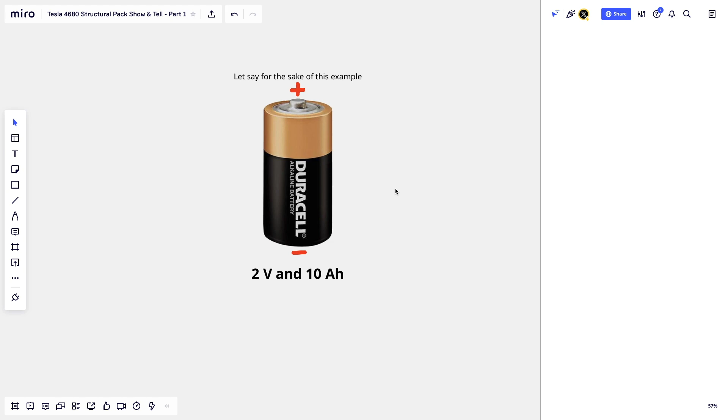And there's basically two concepts I want people to just remember from this. If you're connecting batteries in series, you're adding up the voltages. And if you're connecting them in parallel, you're adding up the electrical charge. That's the only thing I want you to remember from this whole thing. So it's not very complicated. And let's try with an example here.

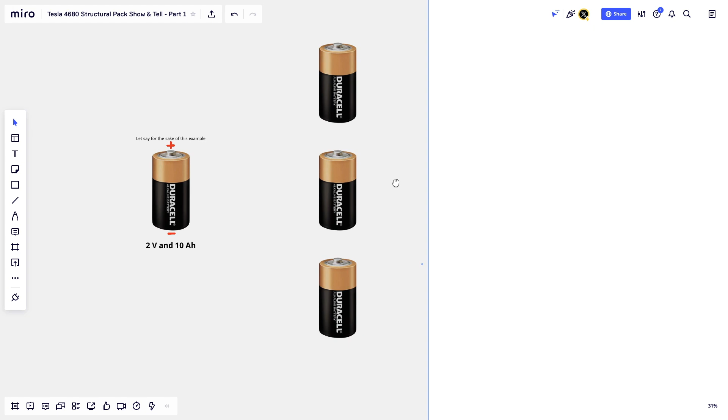So I'll just move this a little bit and zoom out a little bit. Okay, so we have 3 batteries here. So let's say I connect them in such a way. So let's connect this to this. Let's connect this one to this one. And let's take it here on top. This. And little boo-boo here. Let me zoom out a little bit more.

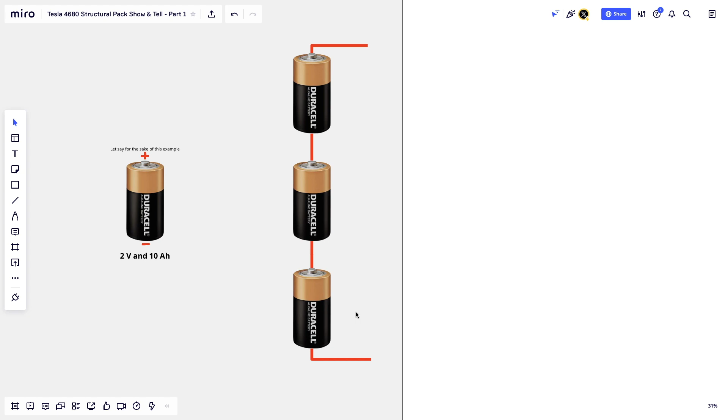Yeah, so if I connect them like this, if the red lines are like wires, do you have an intuition where the positive and the negative is on this arrangement? I mean, you already mentioned that the positive is on the top. Okay, so right? Here would be the positive on top, the wire coming out, right? And negative would be here at the bottom. This is called a serial connection.

And what you have to remember about serial connection, and you can use anything like stacking them up, is basically positive connects to negative, and positive connects to negative. So you can replace this with a battery that has a positive and a negative. Even if there's three in them, it's still positive. When positive connects to negative, opposites to each other, it's a serial connection.

And if you remember, I said, what do we do when it's in series? We add the voltages. That's the only operation you can do, is add the voltages. So if I ask you, what's the voltage of this arrangement, what would you say?

Exactly. So this is 6 volts. Perfect. I hope this is making sense to everybody. If it's not, just call in and we'll sort this out.

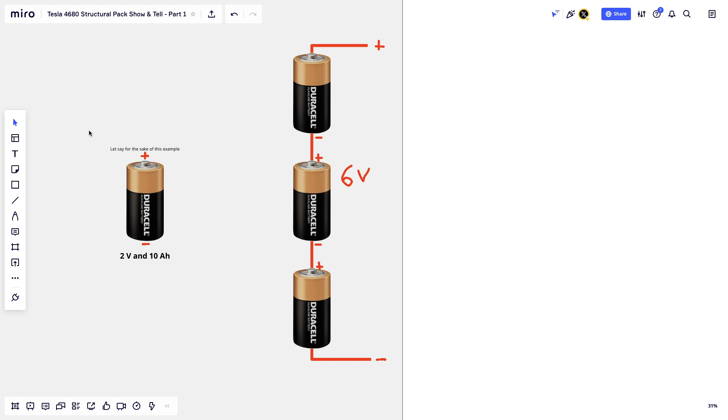So here I have another arrangement of 5 batteries. Now, do you have an intuition where the positive and the negative of this circuit is? Well, the positive is on top and the negative is on the bottom. And of course, if I had flipped the image upside down, you would have said the opposite, right? It's not because you think positive is top and negative is bottom. It's just because you're seeing the nipples. So here is positive, here is negative.

Now, if you see, we're connecting positive to positive here, right? And we're connecting negative to negative to negative. So this is the opposite of what we were doing before. Before, we were connecting a positive to a negative or a negative to a positive. So this is called parallel. Okay. And what did I say about parallel? What's the operation you can do on parallel? You add all the ampere hours, right? Yes, the electric charge, we add them up.

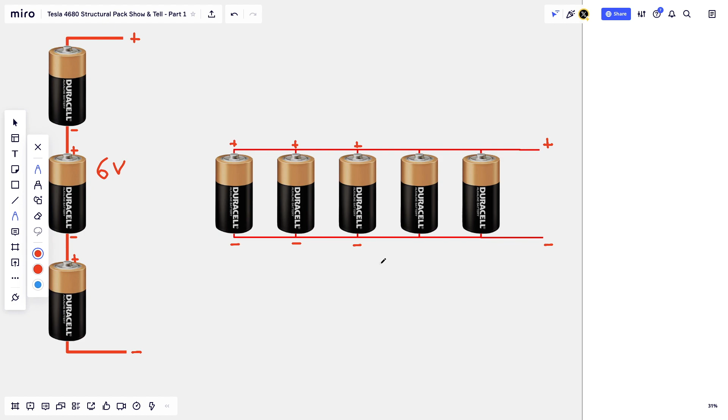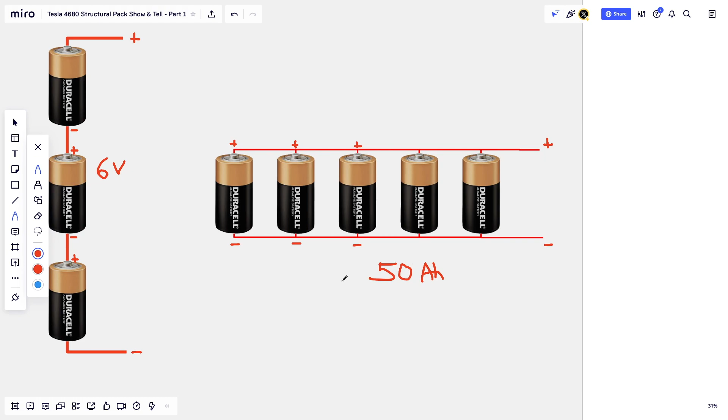So what's the amp hour of this setup? Well, I would say 50. 50 amp hours, and you would be correct. Now, if I ask you what's the voltage of this arrangement? That's a tricky question. This one here. Well, I can either say it stays at 2 volts. You would be correct. Yeah. Thank you, Amy. Yes. So 2 volts.

And this one, what would be the electric charge of this circuit? The one that was at 6 volts? How many amp hours do I have in this setup? Well, here I would say it's still 10. Exactly. Amp hours. Because, like I said, when you connect in series, the only operation you're allowed to do, and you must do, is add the voltages. And when you're in parallel, the only operation you must do and can do is add the electric charge.

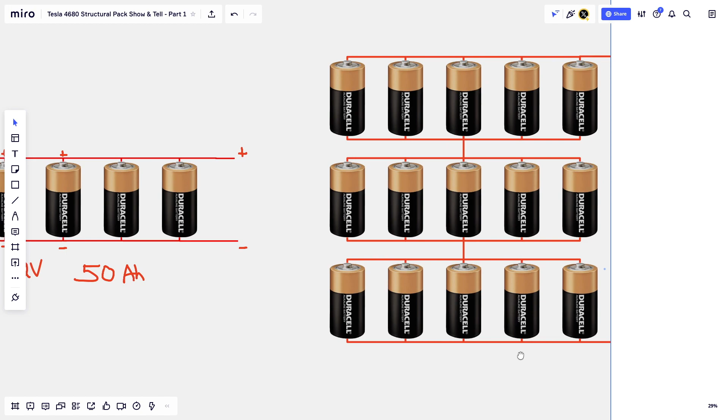So now let's make it a little bit more complicated to finish up this exercise. Oh, gosh. Amy, you're still here, right? Yep, I'm holding your hand, Jess.

Okay, so how do you break this down, for example? Jess, how do you break this down? What do you see here? Wait, let me take a look. Let's start where we started. Where's the positive? Where's the negative? Well, the positive is where the nipple is. That's what we learned. Yes, and so intuition would tell you that this is the positive, the cathode, and this is the anode of this arrangement, right?

Okay. Now, you can break it down any way you want, but you can see that here we have pretty much the same arrangement we looked at before, right? We're connecting positives to positives, and we're connecting negatives to negatives here, right? Right. So we create a group of 5, and now we are grouping the groups, I assume? Yes. So just for nomenclature, this here is called a brick. Okay. So how many bricks do we have in this arrangement? You mean a total of 3 bricks? Yeah. So this is brick 1, this is brick 2, and this is brick 3.

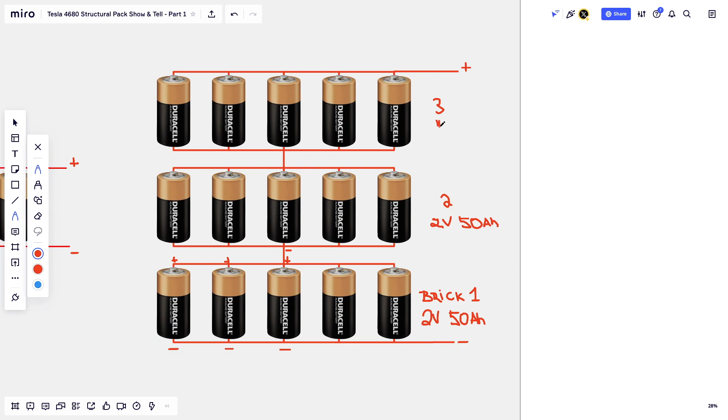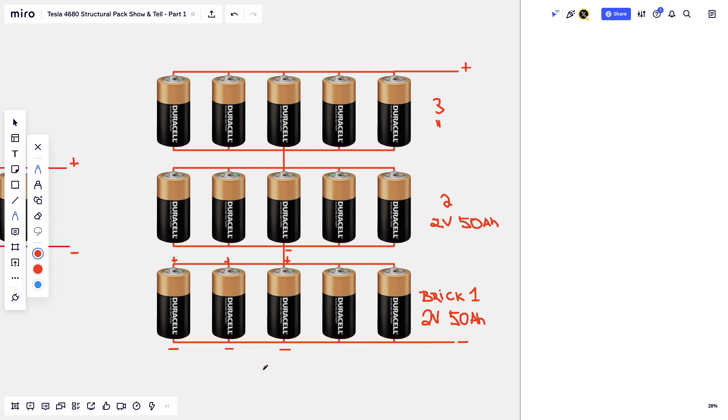Okay, now you could look at this as a whole battery, a battery that has 2 volts and 50 amp hours, and we're connecting them in series, and we're connecting 3 of them. So of this whole circuit, what's the voltage and the electric charge? So it's 6 volts and 50 amp hours, I would say.

Exactly. Perfect. Now, if I wanted to describe this without an image, for example, would it make sense to you if I called this a 3S5P? 3S for 3 groups in series of 5 batteries in parallel?

Yes. That makes sense, right? I wouldn't have picked it, but yeah, it makes sense. Yes, it makes sense in a way that if I tell you I have this particular battery in a group of 3S5Ps, you could immediately tell me that it's 6 volt, 50 amp hours, right? Because if you know that the elemental battery in that arrangement is 2 volts, 10 amp hours, then if I tell you 5P, your mind should say it's 5 times 10, right? And that's 50. And 3S is 3 times 2 volt. You can immediately get to 6 volt, 50 amp hours if you know that the original battery is 2 volts and 10 amp hours.

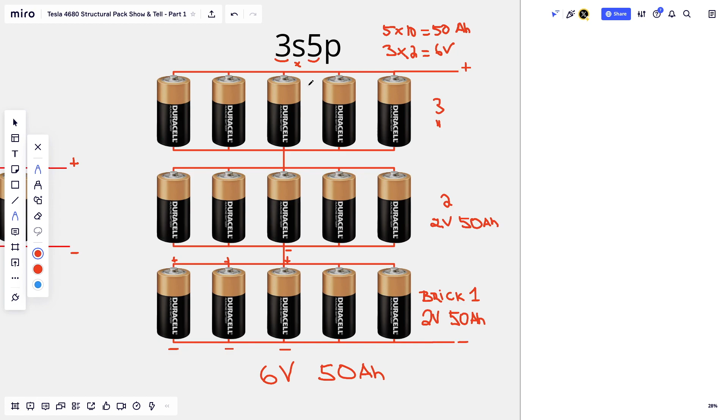Now, another interesting thing of this is if I tell you 3S5P, you can also tell me the total number of cells in that circuit, right? It's 3 times 5. So 15. Okay, now last little concept, because a lot of us hear kilowatt hours as the energy of a pack. So if I tell you that you just multiply the volts by the electric charge to get the watt hours, does that make sense?

So how many kilowatt hours or watt hours is in this arrangement? So I multiply the 6 volts and the 50 amp hours. Yes, right? Exactly. And then I get the volt amp hours, right? So 300? Yeah, so it will be 300 watt hours.

Oh, hold on, I just lost my internet connection. Let me just fix that. Can you guys see me? Yeah, okay. So that was my stupid VPN playing.

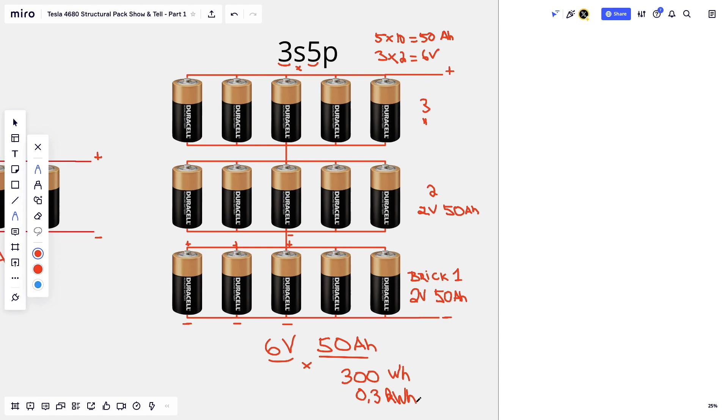Okay, so 0.3 kilowatt hours, right? So this is that arrangement. Are there any questions past this? Does this make sense to everybody? The serial connections, you add the voltages. The parallel connections, you add the electric charge. When you multiply the voltage by the electric charge, you get the energy. Yep, sounds good to me. All right, so if we're done with this, let's move on.

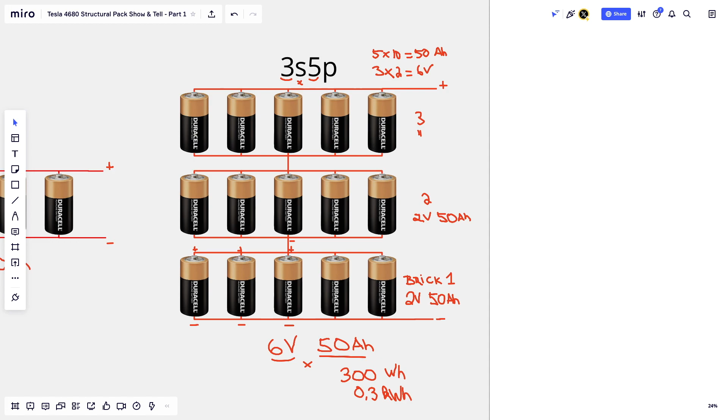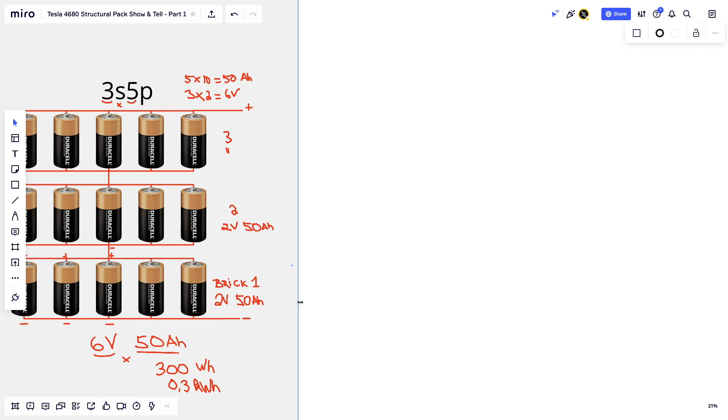Okay, so now I'm just gonna walk you through maybe a history, because people maybe don't know where this stuff has started. So let me unlock this. So let's start with the first image. I'm going to zoom in. This was a photo that was released by Electrek of what was supposed to be a structural pack with 4680s.

And if you look at that photo, a lot of people try to analyze it. The point is not to analyze it again, but people were counting how many cells are in here, right? If you count them on the transverse side of the pack, like here I'm counting them, you'll end up with rows of either 23 or 24. And lengthwise, it's pretty much impossible to determine exactly because the image was cut off. But this was one of the first guesses of what the structural pack would look like.

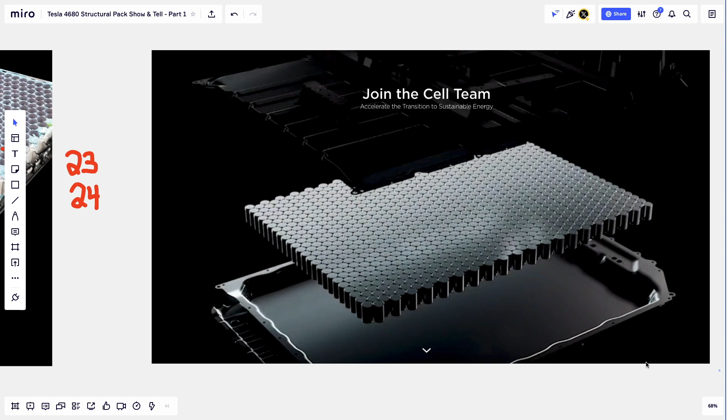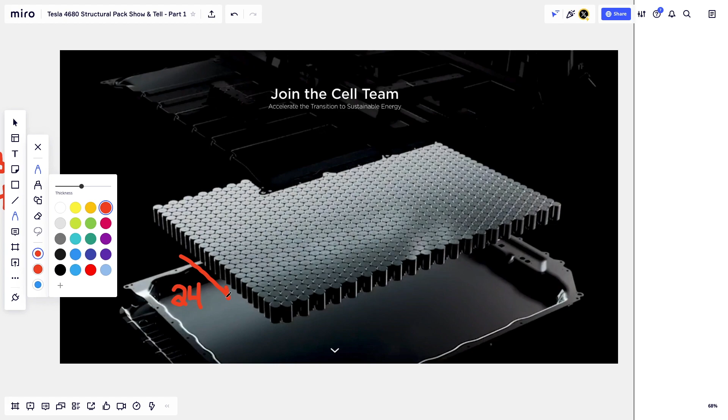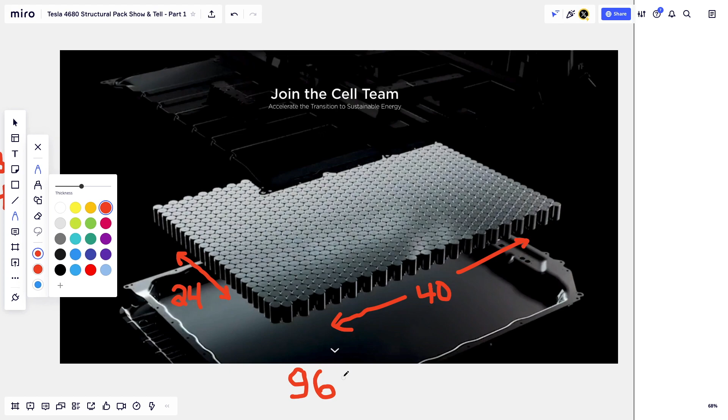And if we move on, then we had the battery day. And this one was very clear, but it was sort of a rendering, right? It didn't look officially like a pack being shown, but more for presentation. But in this photo, we could see clearly that we had 24 batteries in this direction, which is transverse to the motion of the car. And lengthwise, in the direction of the car, we had 40 batteries. So we had 40 rows of 24 batteries, which gave us 960 cells in total. Does everybody see that? Okay, so I'll keep moving fast. This is just a little bit of backdrop.

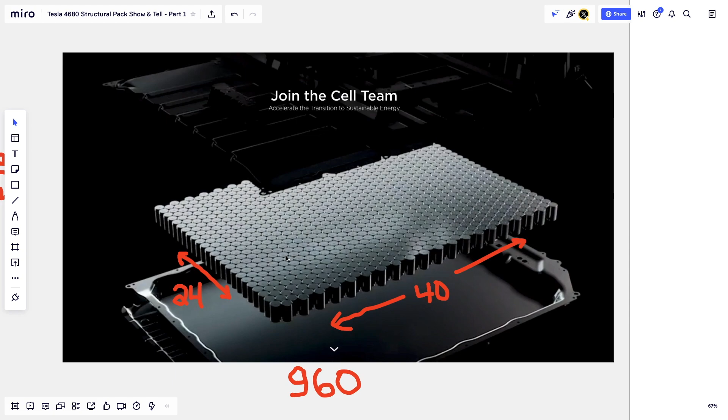We had other leaked photos also. Like we had this one from Sandy Munro, which was a lot more official, right? This is an actual pack, metal frame, as you can see. It's in the tub, with the holes to bolt it on. We see the cells, and we see they're connected and everything. And if you count them, you'll see that there's 24 transverse-wise, and lengthwise, there's 4 groups of 10, which makes 40. So again, we had 960 total cells in this arrangement.

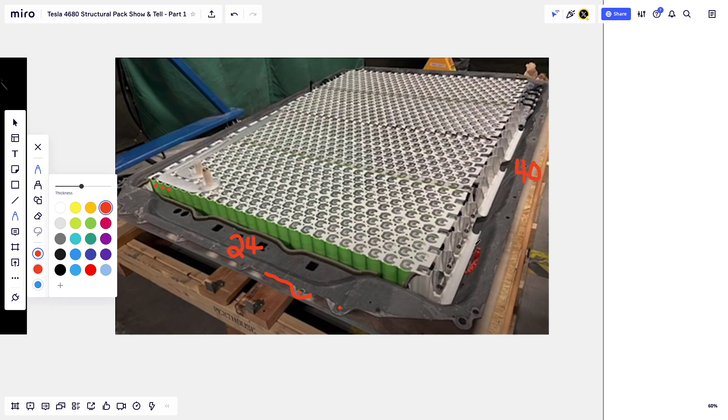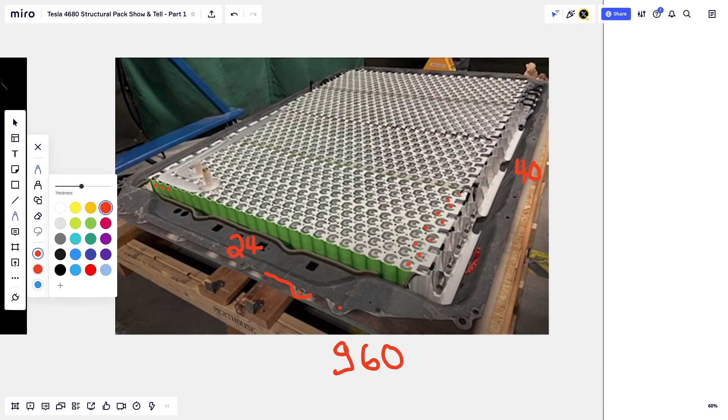So you can count them really easily. 1, 2, 3, 4, 5, 6, 7, 8, 9, 10. And this is 1. And then you can count them again, 1, 2, 3, 4, 5, 6, 7, 8, 9, 10, and so on and so forth.

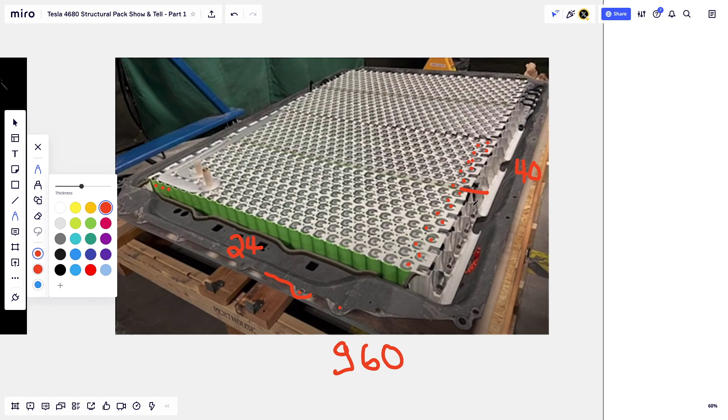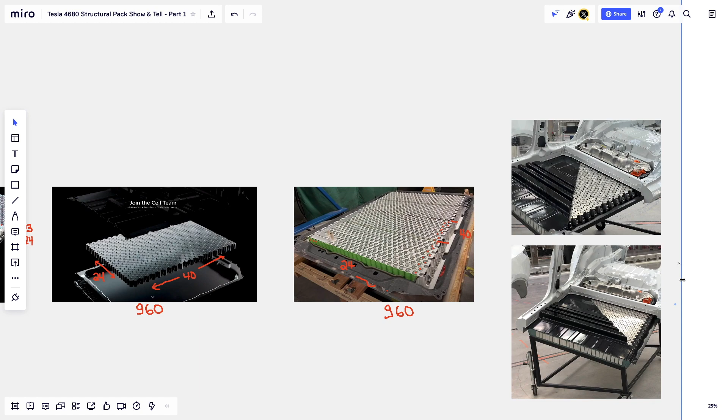So everybody was stuck on 960 at this point. And we had, I think, other photos from Giga Berlin recently. And in these photos, well, you can't actually count the cells because the pack is diagonal and you don't know where they start. But they show you here a cross section where if you count 4, 5, 6, 7, 8, 9, 10, 11, 12, 13, 14, 15, 16, 17, 18, 19, 20, 21, 22, 23, 24. So here we had a confirmation of 24, right?

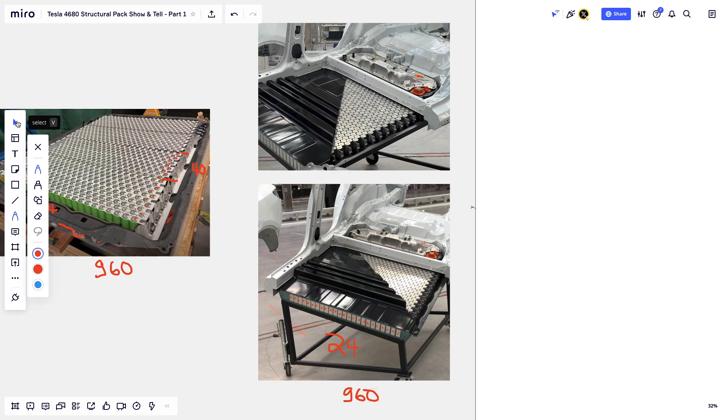So everybody was stuck on 40 by 24, 960 cells, okay? And let me uncover the next slide. It might make it easier to see what I'm talking about. So this is basically the arrangement, right? So what to spot here is, okay, I have 40 cells lengthwise, which is approximately 1.6 meters long, by 24 cells, which is 1.127 meters wide.

And the important thing is the packing orientation I want people to notice. So if you look at the Berlin, you'll see that there's a straight side, I'll be calling this the straight side, and I'll be calling this side the scalloped side, because you can see that here the cells are all touching each other in a row, and here they're intercalated between the other cells, right? So we're having a scalloped type of arrangement, okay?

And you can clearly see that in all the photos that we looked at before, the scalloped side was actually also longitudinal. So the scallops are here, and transversely, the cells are all touching each other, one next to the other. And this is what I call the hexagonal packing 0-1 orientation. Because if you look here, I have an XY diagram. This is the front of the car here. And I'll say X is left and right, and Y is front and back.

If you pick any cell in this arrangement, if you go... any cell in this arrangement. Hold on. Did I make it? Yeah, I think I made a mistake here. Yeah, so this would be 1, 0. Sorry, my little mistake. Let me correct it. So this is 1, 0 orientation. So I mixed it up. Sorry about that. This was prepared quite hastily.

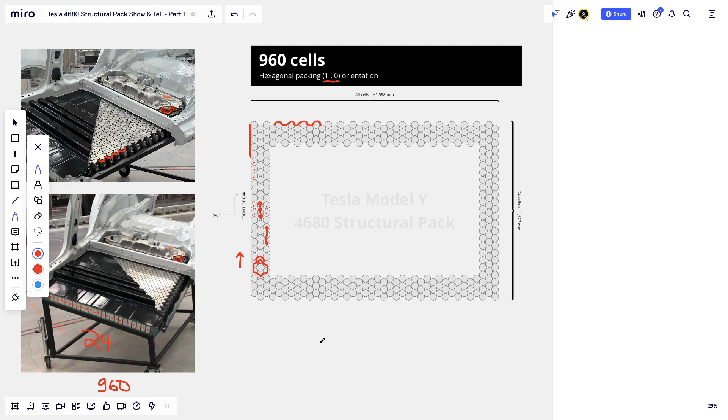And it turns out that this packing is not ideal, even though it was shown to us in a lot of leaked information. This is not an ideal way to pack, and I'll show why. So far, any questions? 960 cells, we got the dimensions. We talked about the packing orientation of how you pack the cells. Any questions so far? No, makes sense. Okay, so nope.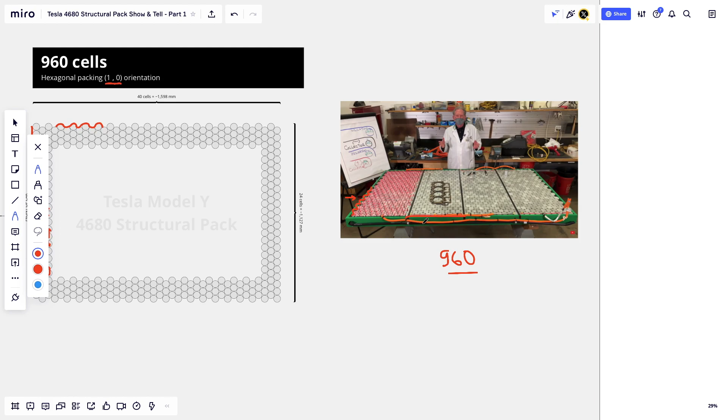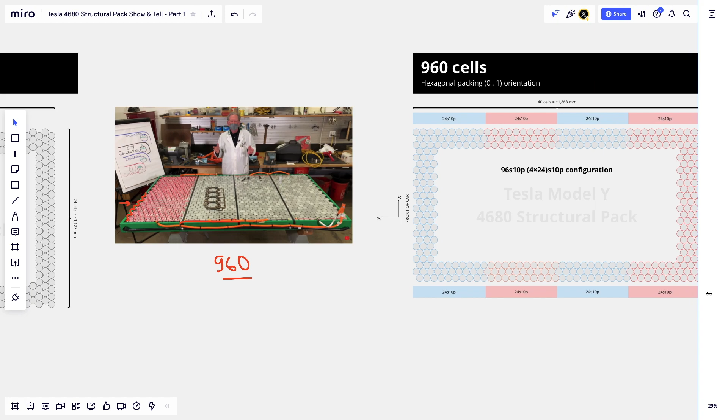Then let's go back to Sandy Munro. Sandy Munro here did the same thing, again, with 960 cells, but you'll see that he clearly put the scalloped edge transverse here. You can see that lengthwise, all the cells are adjacent. So he actually didn't follow the leaked photos, and he went with this type of packing. Same number of cells in a hexagonal packing, but he changed the orientation of it. And I'll just move along and uncover the next diagram, which is going to be a bit more complicated because I'm adding a few details.

But as you can see here, we're using the hexagonal packing 0, 1 orientation. And here it's correct, because if you pick any cell here and you go 1 in the y direction, you find an adjacent cell. So plus y, minus y, you find an adjacent cell, but not on the x. And if you draw a hexagon, you'll see that the point is not facing up. A flat side is pointing up, and the point is facing left or right. Does that make sense?

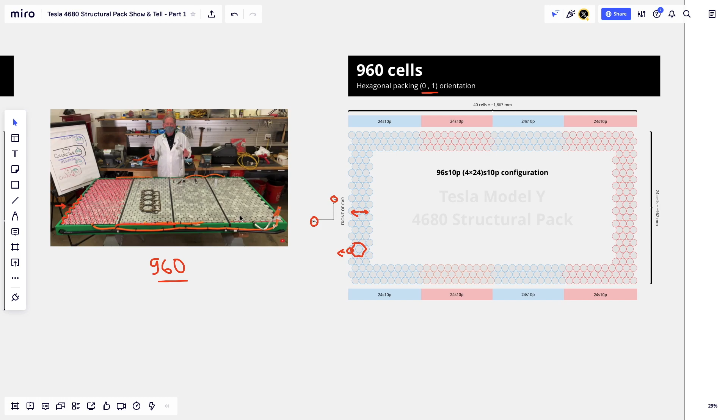And the orientation up top, should that be corrected to 1, 0 as well? No, this is 0, 1, because the first number is always x, the second is y. So if it's y 1, then this is where you find it. So before, it was probably a copy-paste error as I was building the thing. The other one was 1, 0. This is 0, 1. So it's the opposite.

And I'll zoom out a little bit here for the video so people can see the pack dimension changes a lot. It becomes much narrower and a little bit longer. And I have the dimension. Previously the dimension was close to 1.6 meters long, and now it's 1.8 meters long. But width-wise, it was 1.1 meters wide, and suddenly it's 0.9 meters wide.

Okay? So this is how Sandy Munro placed them for his video. He didn't follow along, and I would tend to agree that this would be the most efficient configuration. If you remember, Elon had mentioned at Battery Day the benefits of putting the cells towards the center of the car. There are two benefits. One is if you get side impacted, the batteries are not getting touched immediately. And secondly, the polar moment of inertia. So the closer you can put the mass towards the center of the car, the more nimble the car is when it's taking turns. Does that make sense?

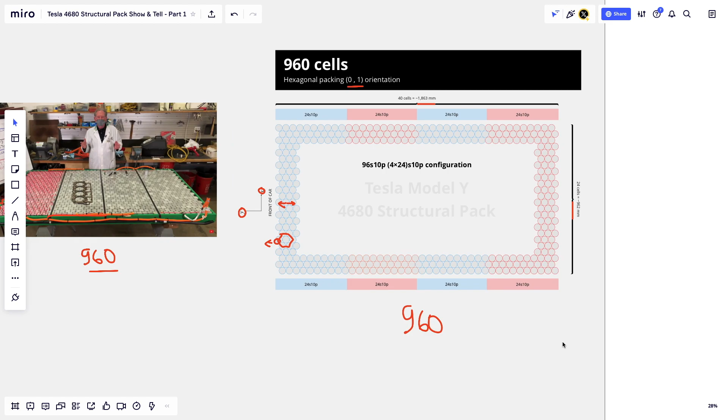Okay, now there's a few other things here I want to point out. And this is where where we started the presentation will be helpful. You can see how he connected them. He did 96S10P, and he very precisely did 4 times 24S10P. So here I'm going to be highlighting a brick. I put the colors differently for every row of bricks. So these 10 cells, because we're talking 10P, so it's 10 in parallel, this would be one brick. And the next brick would be this one. Oh, I didn't take another color. Okay, and this would be another, and so on and so forth.

And I removed the cells in the middle just because it would take Miro too long to re-render all these circles. But you have to imagine all this is filled with cells. You get the idea from the packing of the cells on the periphery. And all these bricks are connected in series. So like we said, the math of the S and Ps: if you have 10P and you have 960 cells, then by default you're going to have 96S, right? Because if you multiply the 96S by the 10P, you get the total number of cells. So right away, 96S10P, you already know we're talking about 960 cells total.

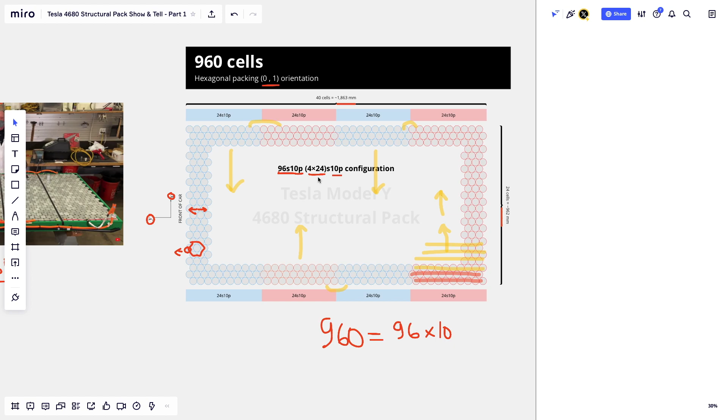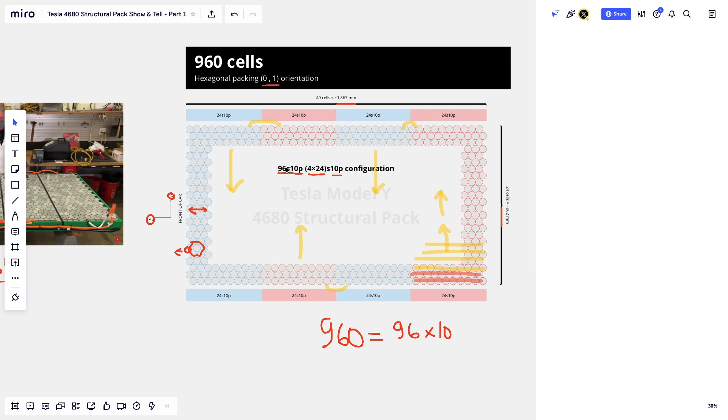So Sandy came up with the number of 10? That's what he's thinking. And of course these numbers are not arbitrary, because if you do 11, then how are you going to balance this out, right? If you have 960 and divide that by 10, it's a nice round number, you get 96 in series, right? But if you divide 960 by 11, you're not going to get a round number. So this is what he came up with. This is Sandy Munro's based on the video. I think he did 2 or 3 videos on this. And this was his prophesized arrangement of cells. And of course, this is not official or anything, but this is how he saw it.

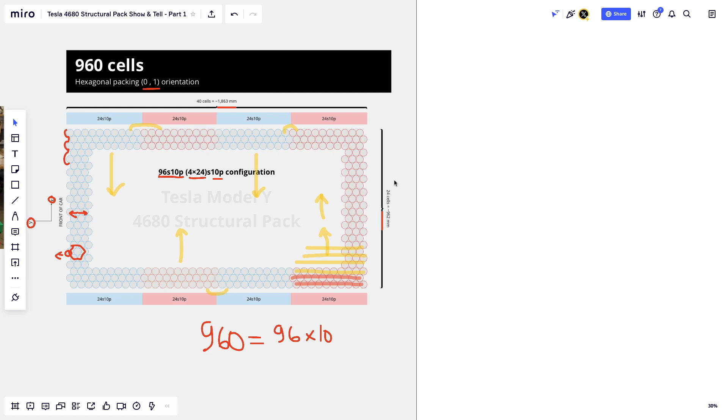So any questions here? So do we get that there are 4 pseudo modules? Each one is 24S 10P. And if you connect all these modules in series, you get to 96S 10P, which gives you a total of 960 cells. And do we also get that he flipped the packing arrangement by 90 degrees, making the longitudinal cells touch each other, and the scalloped edge is transverse? Is that clear so far? Yes. All right, so let's keep moving.

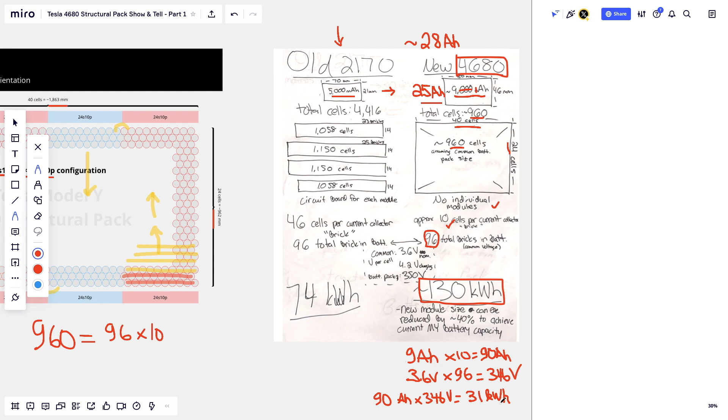So 346 volts. And if we multiply that by 90 to get the energy, this would give us a pack that's 31 kilowatt hours, which is way too small, right? The 2170 pack is around 74 kilowatt hours, and this one would be 31 kilowatt hours. So there's a mistake. Something happened in his calculation that made it not right. So yeah, 130 is way too high, especially for a Model Y. That would be like 600 miles of range with the 4680s. They're not going to do that.

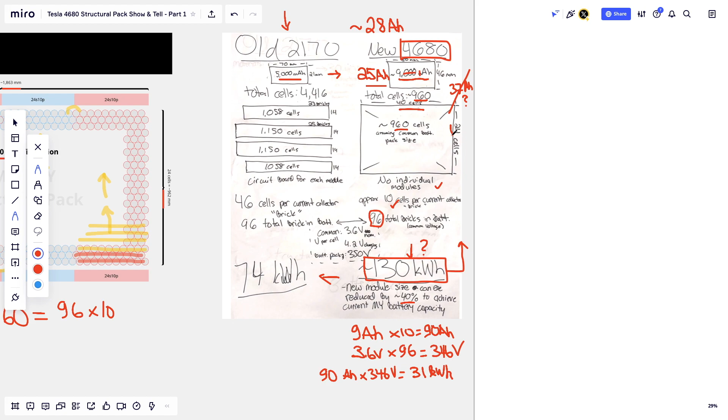Exactly. But to be fair, however he came up with 130 kilowatt hours, he said it could be reduced by 40% to basically match the current 2170 model. But I have no idea how he came up with 130 kilowatt hours, starting with 9 amp hours per cell. And the 9 amp hours per cell is also not good. And if you take 130 kilowatt hours and work your way backwards, you get something, I think, around 37 amp hours per cell, which is too big. So I don't know what happened here. Some wires got crossed or something, but this is not correct. So I'll show you my calculations here.

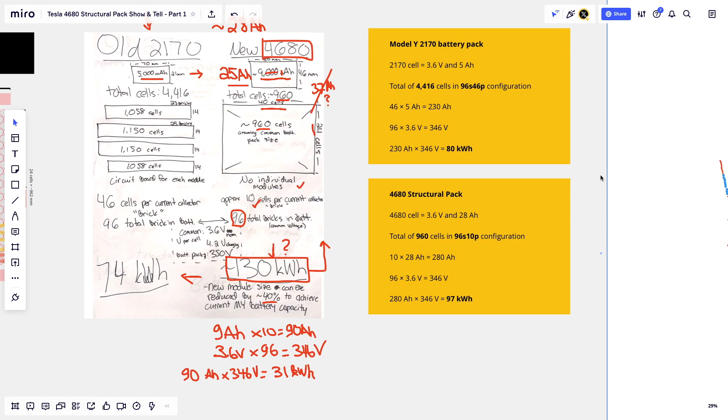So I have here, starting with the Model Y, the 2170 cells. They're 3.6 volt, 5 amp hours. They might not be precisely 5 amp hours, between 4.8 and 5. There's a total of 4,416 cells. They're arranged as 96S 46P. Again, this should become second nature. 46P means that you multiply 46 by 5 amp hours, and you get 230 amp hours. You multiply 96 by the voltage, you get 346. You multiply the two together, and you get 80 kilowatt hours.

Of course, this is not the advertised figure because there's the usable capacity, and usable is around 75 kilowatt hours, but theoretical numbers give you 80. And I will be continuing with those theoretical numbers, even though they're slightly offset from the usable energy in a pack, because we don't want to mix one with the other.

Then if I do the 4680 structural pack, the voltage doesn't change because this is based on the lithium chemistry. That's 3.6 volts. My estimate is 28 amp hours. If I take his same arrangement of 960 cells and 96S 10P, 10P means you multiply the electric charge by 10. So you get to 280 amp hours. You multiply 96S, that's the series connection, 96 times 3.6 volts.

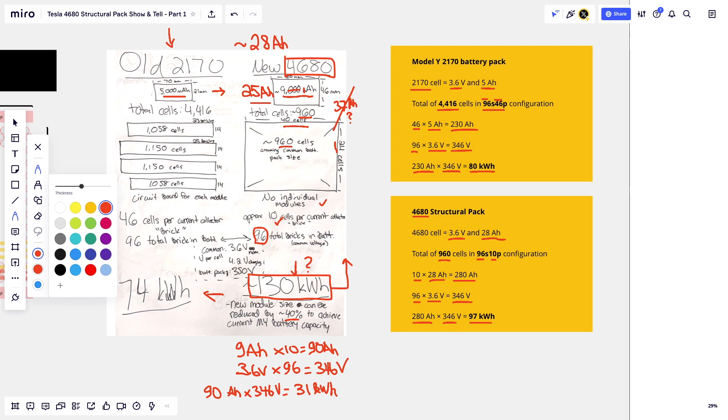Any questions so far? Anything? I'm pretty sure we have 84 people live in the room. Any questions so far? Everybody is super silent. Okay, we got a question. Claps, go ahead. You can unmute your mic. I'll take this opportunity to take a drink. Are you able to hear me?

Mm-hmm, go ahead. I know some of these are estimates, but on the voltage, any reason you use 3.6? Nominal voltages can be 3.8 for chemistries that are being used today. And even on the capacity, is 5,000 on the 2170 a known number publicly, or is that an estimate? Of course, all these things, yes.

Of course, the 3.6 is the nominal voltage, and some people will use 3.7. If you Google lithium-ion battery voltage, I think Google will answer that it's 3.7 nominal volts. This will vary a bit, but big picture, it doesn't change much. And for the purposes of what we're discussing, the only thing that's important is to keep the same numbers for each. So I'm not going to use a nominal voltage that's different for the 2170 than for the 4680. I'll use the same ones, compare apples to apples. Yeah, that makes sense.

And the only other question I had was to maybe double click on the 28 amp hour number. Could you just elaborate on that? Volumetric, is that what you meant? Yeah. So there's many ways of doing the 28 amp hours, right? So first of all, it was already said 5x energy. So right there, you're around 25 amp hours to start with. That's like a bare minimum. Then you can work 2 ways.

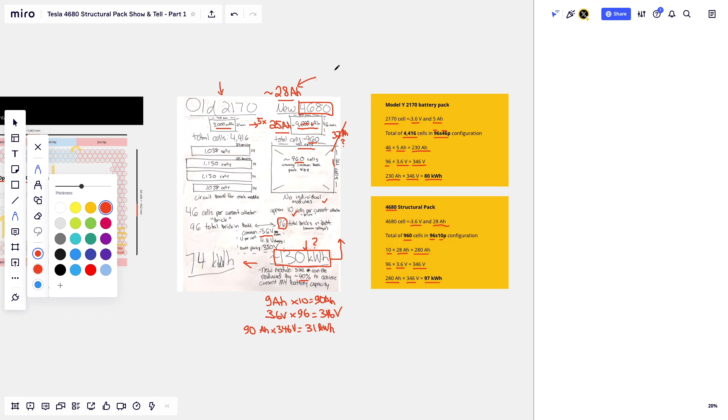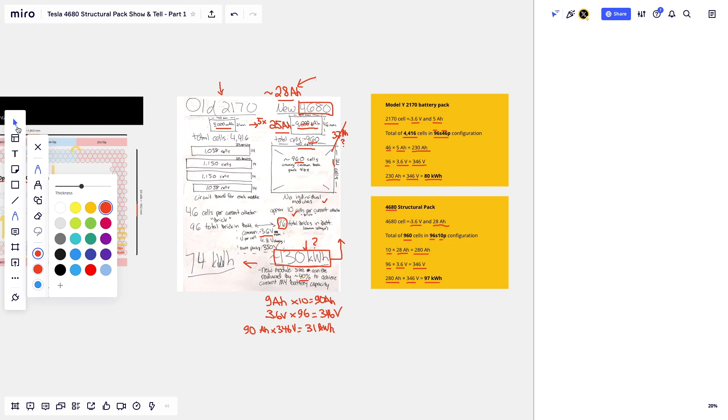And then if you just go volumetrically, you calculate the volume of a 2170 and the volume of a 4680, and you say one is that much bigger than the other, and you apply that to the electric charge, you get a number that's smaller than the winding, I think 27 amp hours. So I chose something in the middle. I see, so you did like a mechanical model. Yes, exactly. But I thought this might be too advanced for this stage of the presentation. We might do more advanced ones later.

But for now, I'm just going 28 amp hours. I'm giving you the why. Like I said, 5x, it's 25. I'm giving you the 28 amp hours. And I'll even add it, it's approximately. So I'll put the little thing in front. It's approximately 28 amp hours. Awesome, thanks for the explanation. No problem. I'm going to take the next caller real quick.

Derek, you're up. Unmute. Hey, guys. Hopefully this isn't a stupid question. No stupid questions. How do you suspect they're going to handle the different pack sizes? Are they going to decrease the size of the bricks? Are they going to just change the chemistry and leave the pack size the same, considering that it's structural? How do you foresee that going?

Okay, we'll be addressing this a little bit later in the presentation. The presentation's not over. I'll come back to this answer because, of course, my estimates are not the same as Sandy's and the leaked photos. So if it's okay, we'll address this. Come back with your question if I forget to address it. But I think that's best left for about 15, 20 minutes when I'm at that stage of the presentation.

I'm going to take Brian next. Brian, you have a question? Oh, Brian's left. Okay, so, is Brian back? I think, yeah, go ahead, Brian. Yeah, I hit the wrong mic button.

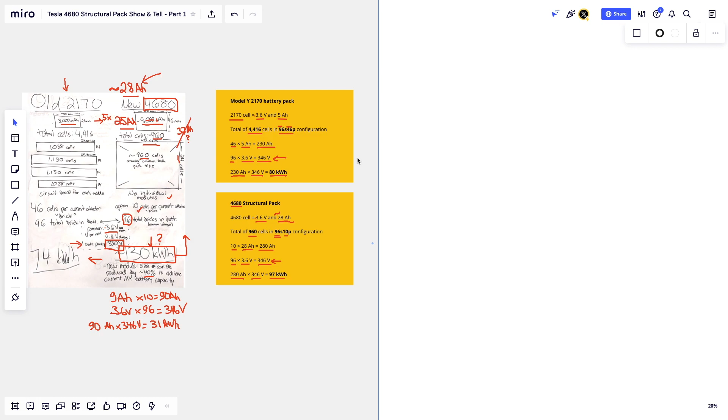Okay, so we'll get to talking about different voltages because we've had other information coming from Tesla since the 4680 has been revealed. If there's no other questions, I'll just move on and get to those parts that you're already questioning. Very good questions. I'm going a little bit through the process of how I approached the problem as I was looking at it.

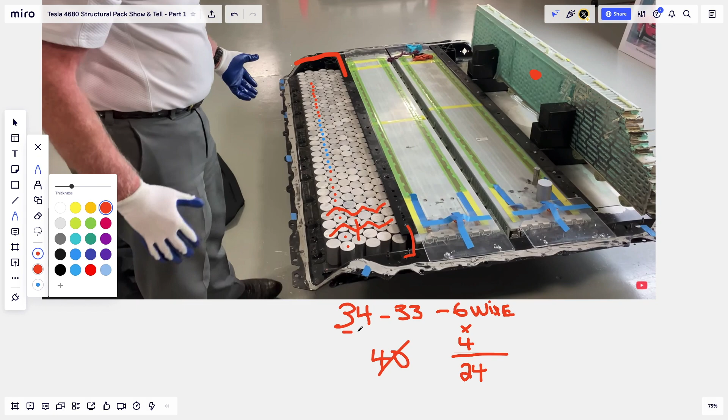So what Sandy Munro showed us, by putting 4680s in an actual 2170 pack, is that there's 4 module channels per pack, 6 rows per module channel, 24 longitudinal rows per pack total, and each row has between 33 and 34 cells. But there's a catch here.

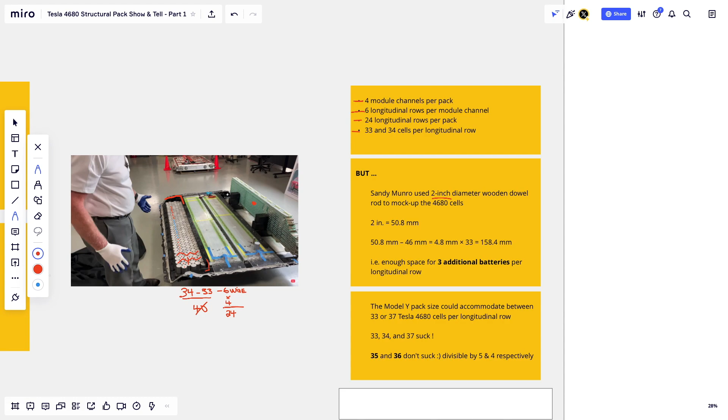The catch is that Sandy Munro, if you listen carefully, used 2-inch diameter wooden dowel rod to mock up the 4680. His guys went to the hardware store, bought 2-inch dowel rod, cut them to 80 millimeters in length, and spray painted them silver. But 2 inches is equal to 50.8 millimeters.

So if you take 50.8 minus the actual 46 it's supposed to be, you get an extra 158 millimeters from that. Do people get this? So we can get 3 additional batteries per longitudinal row here. And this is where the pack could accommodate somewhere between 33 and 37, not 40.

But then, like I said, if you're going to do modules, you need round numbers, right? So this is where I wrote here that, let me take the pointer here, 33, 34, and 37 suck. As a number of cells per longitudinal row, those numbers suck. The numbers that don't suck are 35 and 36 because they're divisible by 5 and 4. And we'll see shortly why it's interesting to have numbers that are divisible by 5 or by 4.

So this is where I was in my process of thinking about these packs. They're not going to change the size of the car. And if you look widthwise at the pack of 2170s, yes, there are some structural elements. You have these big black metal bars that are actually holding up the car and the pack. These will be gone with the 4680s, but you're not gaining all that much. You're gaining widthwise, but you're not gaining lengthwise. Does that make sense? These huge long bars here, if you remove them, you might put one extra cell widthwise, but it won't help you get a cell lengthwise.

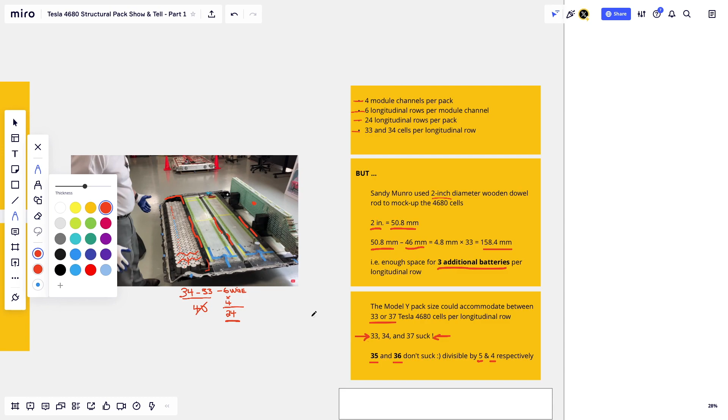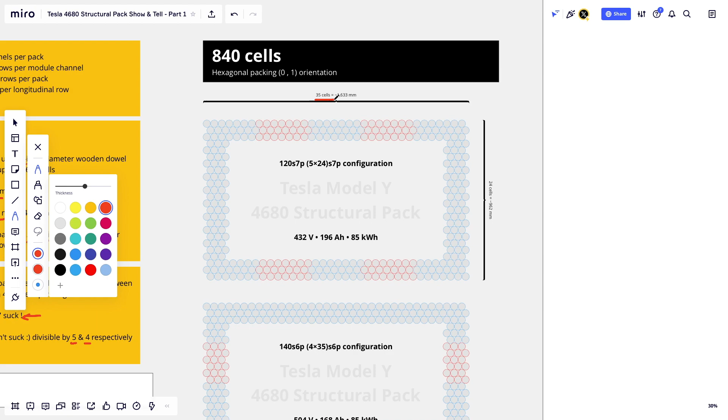But I still like to stick with the 24 because, first of all, it will bring the cells closer to the center, as I mentioned, and this is good for safety and for the responsiveness of the car in turns. And so I stuck with the number 24. So let's move along. Here is my first thought on how we could do the battery pack. I'm going with 35 cells. Let me annotate it. As you can see here, I'm going with 35 cells lengthwise and 24 cells widthwise, and with the hexagonal packing orientation 0-1, where the cells touch each other lengthwise.

And to connect them, I have many ways of connecting these, and this is what I'll be going through. The first way I'm connecting them is 120S7P. So if you see here, again, we have our bricks. We have 7 cells per brick. If you divide 840 by 7, you get 120. And I'm connecting those 120 bricks in series, which gives me a pack of 432 volts, an electric charge of 196 amp hours, and energy of 85 kilowatt hours.

Now, I want to address this 85 because with the 2170s we came up earlier with 80. Why would I make the pack have more energy than the previous one? Well, my reasoning is twofold. First of all, we know that these packs and these cells are new technology, and Tesla usually throttles the performance or capabilities of their new technologies for at least about a year until they get really good real-world data on them. And then via over-the-air update, they basically release more range. So you can access more of the battery, but for a time, it's reduced.

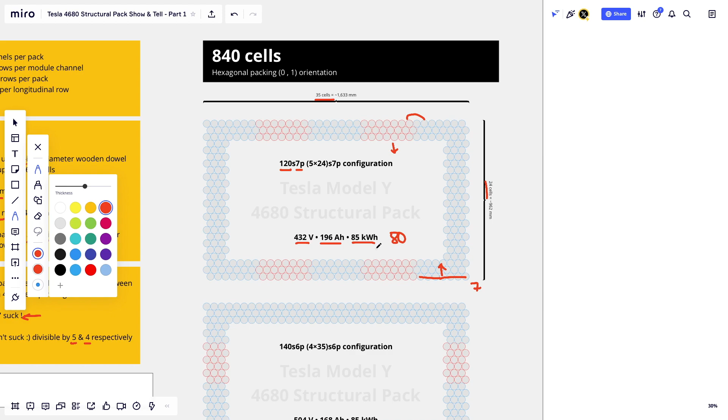No, I think, first and foremost, all the leaked photos and all this stuff is not actually final. We know that Tesla iterates at an amazing speed. They've fully implemented agile manufacturing, and they're working with prototypes. So these were in the design phase. They were trying different stuff out. I could be wrong. They might go with scalloped sides. We won't know until Munro or somebody else breaks apart a 4680 pack and shows exactly how it is. This is, of course, just nerding out on engineering, thinking about this problem in different ways and what makes more sense. So a 97 kilowatt hour pack does not make sense. You know what I mean?

Tesla wants to keep its lead in range and efficiency and all this stuff. But if tomorrow they came out with a Model Y with 600 miles of range, it wouldn't make sense because they would have to charge for it. So they would become uncompetitive price-wise. So the best thing to do is to come out with a battery.

And this is where I was explaining. I think at first, even if you did the exact same size pack, you would have more range in a Model Y if you used 4680 in a structural pack than if you used 2170s in a non-structural pack. So doing the same energy would already give you more range.

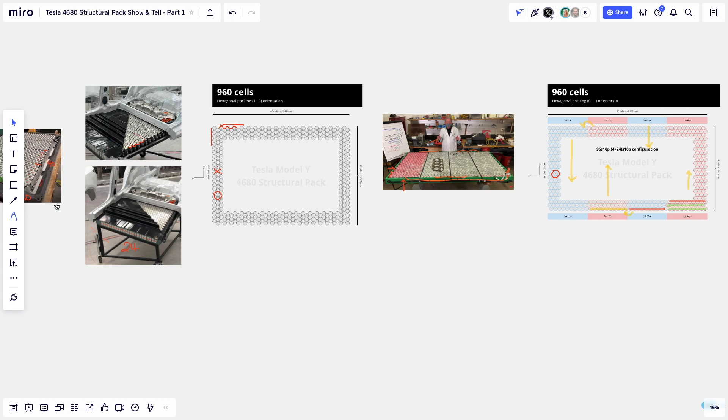Okay, so I'm going to move back to the very first pack in the presentation, just after the Berlin photo, that diagram, and I want to show you something, because maybe I'm giving a little bit of a spoiler here, but it's not that big of a deal. So I'm going to zoom in on the little graph. So if we do the cooling ribbons the way we saw them at Berlin, right? Yeah, they have an offset. But look at the cooling ribbon. If I draw it, and of course it's going to be pretty shitty because I'm drawing with a mouse, as you can see, I'm going to draw it here.

You see it's snaking through, right? You see how much contact there is between the batteries and the cooling ribbon? It's not much, right? It's just touching the side of the cell. I was thinking like 5 millimeters. Yeah, maybe. Now let's try it in the other direction, if we run the cooling ribbon in this 1-0 configuration, but we run the cooling ribbons the other side. Do you see that the wave is much bigger and that a lot more ribbon is touching the cell? Yep. So we'll have to address this in the episode that we talk about the cooling.

I was just wondering if that would affect your mindset on how long the ribbon is, and would it be too far for the cooling to travel from one side to the other? There's no consideration of how long it is. I don't think that's ever been a problem. If you look at the 2170s, the modules are lengthwise, and they go full length, and they cover, I don't remember the exact number, but a shit ton of batteries lengthwise, and they're cooling them.

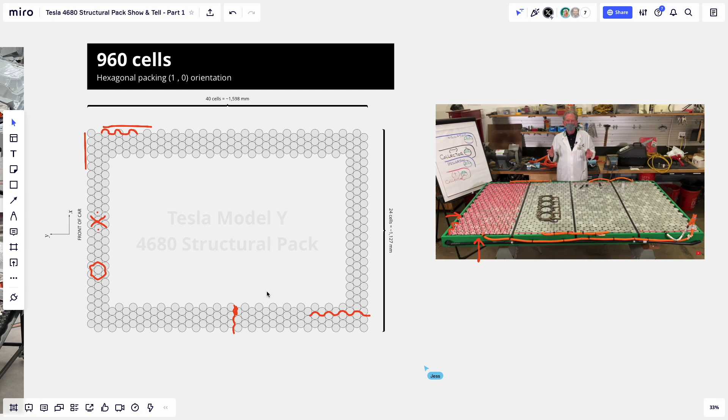All right, and thanks for the series and the brick layout explanation at the beginning, because sometimes I get confused as to how to compare battery pack sizes. So yeah, that kind of helped give me a reference to build on what you did. That was really, really well done. So I appreciate it. That was my hope, that people would get a little bit of value from that, especially those who are maybe not familiar with it, because we're going to hear a lot about these 96S10P, and I was pretty confident that people might not be familiar with what exactly it means. So I'm glad you found value in that.

I'm on the mechanical side. The electrical side kind of trips me. So. Yeah. Well, thanks a lot, Ricky. I needed it. Yeah. Joe, you're up. Hey, again, thank you for doing this.

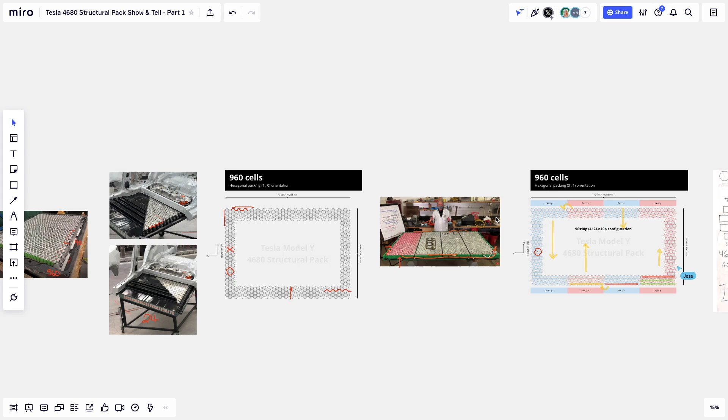Hey, so it looks like it's a really tight fit, obviously, right? But the part I can't get over, and I'm not trying to be a pain here, is it's hard for me to believe Tesla. Have they ever shown us a prototype that wasn't, I'm just gonna be shocked if it isn't laid out the way they showed in Giga Berlin. And so my only question is, when you're doing all this, can you just do a little footnote or something so that if it does turn out to be like Giga Berlin, at least it's got some relevance. I think it's not a huge difference between the two, but it's just a thought. What do you mean, like a footnote to what?

So everything you're doing is the 0-1 orientation. Yeah. And so all I'm saying is could you maybe just do the main presentation on that orientation? But if it does turn out that what they showed is really what the pack's going to look like. Oh, well, when somebody tears down a pack, there will probably be an episode on that too. And I'll probably comment, I was totally wrong, and this is why I think I was wrong, because what I'm seeing now makes so much more sense and I didn't think about it. Or it'll be the opposite. It'll be like, I told you so or something.

And this is why, even if I got it right on my design, there'll still be things I'll be wrong on. I can guarantee you that. I'm nowhere near, and I'm not iterating as they are, and I don't have all the constraints and all the parameters they're considering. Like I said, I'm just seeing how many fit in a current pack, and I'm saying, okay, so how would I do it? And of course, I'll be wrong a lot, even if I'm right.

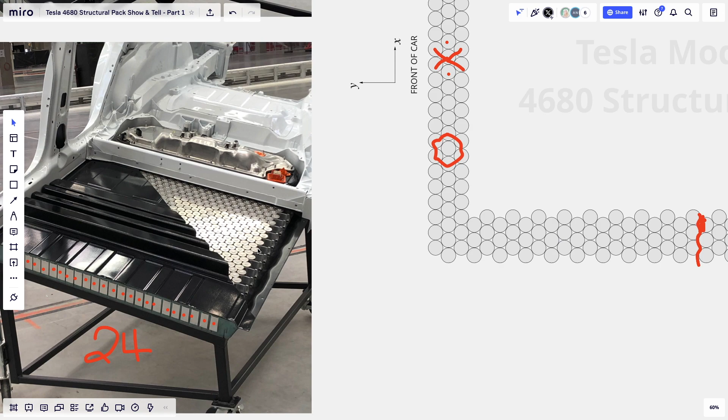But my question is, looking at the Berlin picture, again, that's why it's a tight fit. I'm just saying, in my humble opinion, you might want to just count and figure out what you think the actual number is going to be. Well, I guess you've already done that. So okay, I'm zooming in right now on the Berlin one on the video, so people know, the bottom one. And I'll tell you right now, for me, there's something wrong here.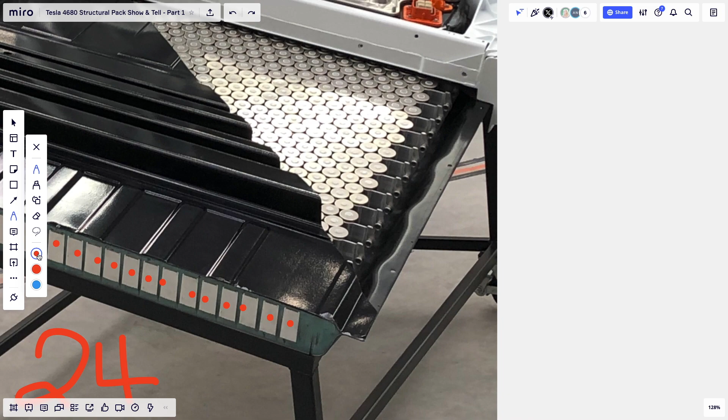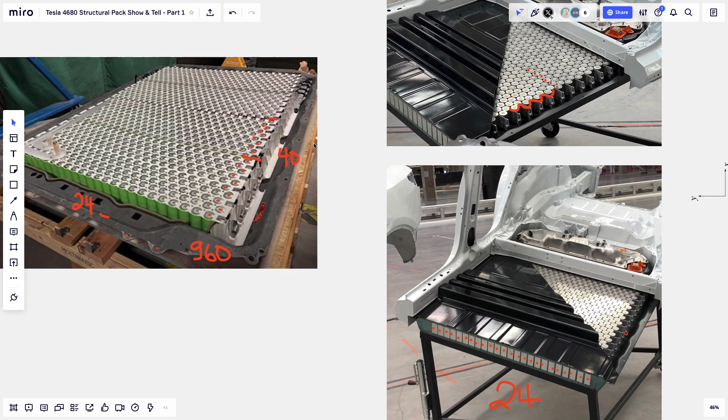Yeah, because I zoomed in so much. Right, I just envisioned they'd literally be a tube. Well, I guess they can. You see, so they need, and actually we saw an example of this in this one. If I go to the previous one, the leaked photo to Sandy Munro, you'll see that it's a bit different. This is 960 cells, but you can see here, there is the manifold, with the little pipes connecting to each cooling ribbon.

And you can see that it's not complete. The pipe seems to end here. And this plastic thing seems to be where the main pipe will rest. So here the pipe would be on and going all the way forward. And you can see that even on this prototype, the inlet for the ribbon is flipping sides. So you have 1, 2, 3, 4, 5 ribbons with the inlet pointing that way, and you have 1, 2, 3, 4, 5 pointing that way.

And the next 5, the 2 center rows point the same direction. But then the last ribbons point the same direction as the first one. But you still need a manifold. There's a T here. Right, and it looks like it's per module. And there's no room for that in the Berlin mock-up. Gotcha. But my question is, they're showing that they could fit 960 or 940 in there, and that's why I say a tight fit.

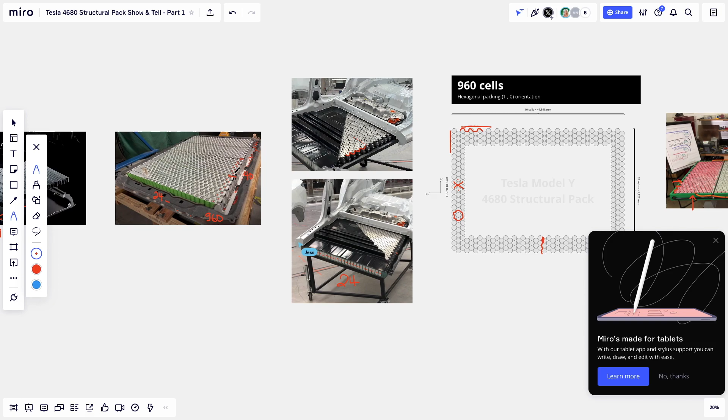But why would they do it? 97 kilowatt hours. Why would you give people today a 97 kilowatt hour pack on a car that already gets more range? No, I agree. Okay, so we'll see that in part 2, right? You'll show what's going in the front and back or side, where I'll be addressing the current collection at pack level. So how are we connecting those cells?

And it might be the same episode, I don't know, because it's very linked to the cooling. So I might be doing it in the same episode or 2 separate episodes. And if I do 2 episodes, one on current collection and one on thermal, I don't know in which order I'll do it. I still don't know. I'm improvising this.

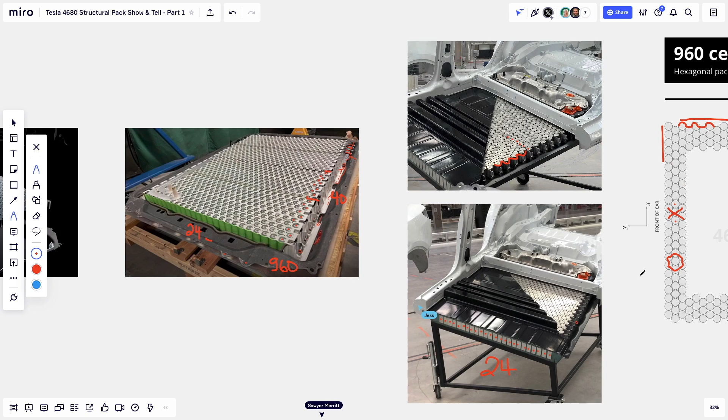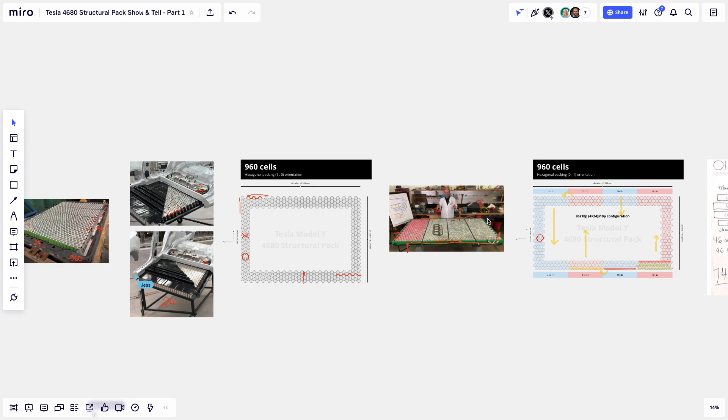I want people to know that all these presentations, I'm not spending hours on them. These are all photos that I have collected over time. The diagrams were already there because that's how I think, so I draw it out. So I'm basically assembling something and putting it in an order that makes sense as I'm uncovering each photo. I pretty much know what I want to talk about because I've already thought about it. But this is nothing prepared. I'm improvising this every time I'm talking to you guys.

And this is why I also appreciate the social aspect. This is not like a podcast or a YouTube channel where, I got to say, Jordan Giesige does amazing work, but I couldn't do that. I don't want to spend that much time doing content. I'd much rather just throw something together, which is my thoughts. It's still thought out, but it's rough, and we can annotate and chat together. And if somebody has an idea that I've missed, I totally appreciate people jumping in and saying, "Oh, did you think about that?"

Yeah, no, this is an awesome format. You do a great job, and the amount of time you spend educating in the beginning and making sure everyone's along for the ride. I mean, that's the difference between an online course and being in person where you can ask the person questions. And so I think this is a way better format than podcasts or anything else. So thank you. I'll butt out now, but thank you so much. Yeah, my pleasure, man. Thanks a lot.

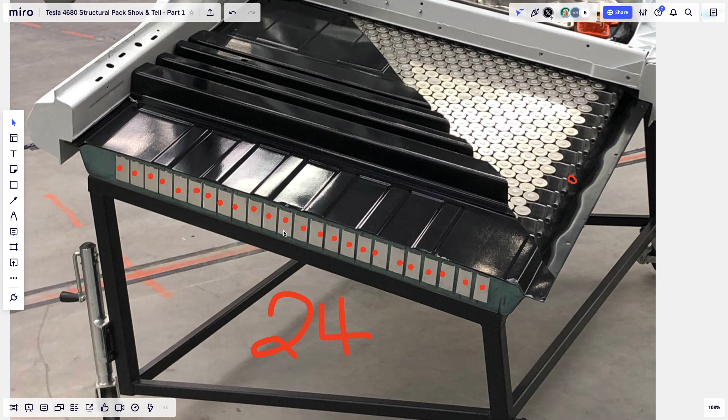Yes, and if you look at the Berlin photo I'm zooming in on right now, you'll see that there's a lot of foam underneath the cells. These of course are not cut-out cells, these are mock-ups that they put, but you can see that there's a lot more foam at the bottom than there is at the top.

Like between the top metal plate where the seats are going to be bolted and the foam gap that's there, versus the foam gap that's between the bottom plate, which is road facing, and the bottom of the cell, there's a lot more foam there. And this is where I'm thinking putting cooling there is probably not the smartest thing to do.

Because again, if you have anything punctured, that cooling plate is going to be one massive thing. And depending how the impacts happen, it's going to distort all the cells that are in that pack. Whereas if you only have structural foam, the foam is going to get sheared off, but the cells are going to remain intact. So that's my line of thinking for now. But of course, we'll be addressing this in more detail in future episodes.

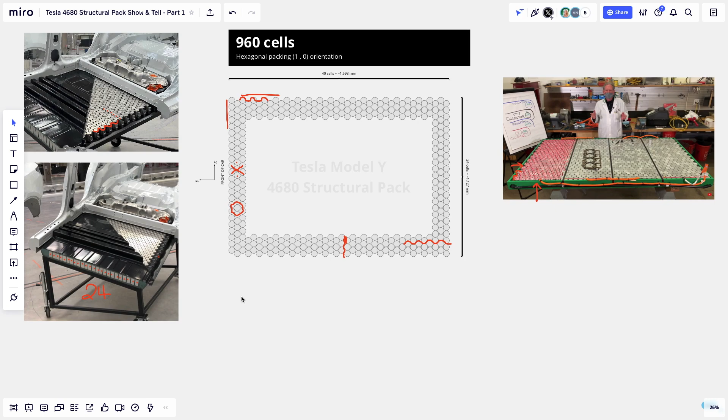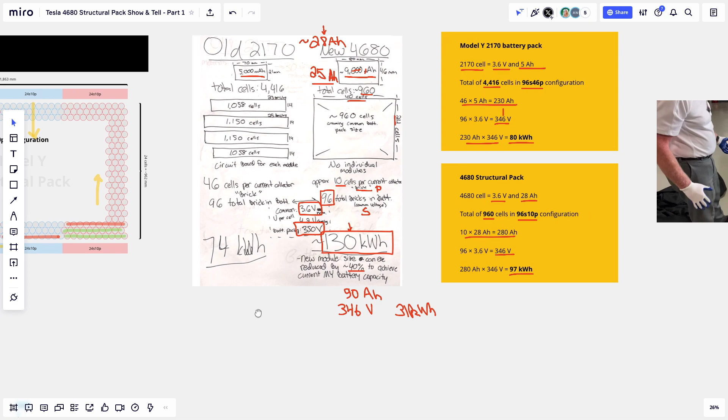Okay, one last one, I think. At least I hope so. Based on your answer, the voltage on the original 80 kilowatt pack of the Model Y was a little bit higher, very close to the 400 marker originally, right? No, it's 346, referred to as 350.

So it's 346 volts. Even if there's 4,416 cells, it's a 96S 46P configuration. And the 96S, as I explained, is what determines the voltage. So if you have 96S, the same configuration as Sandy Munro did, you get to 350 volts.

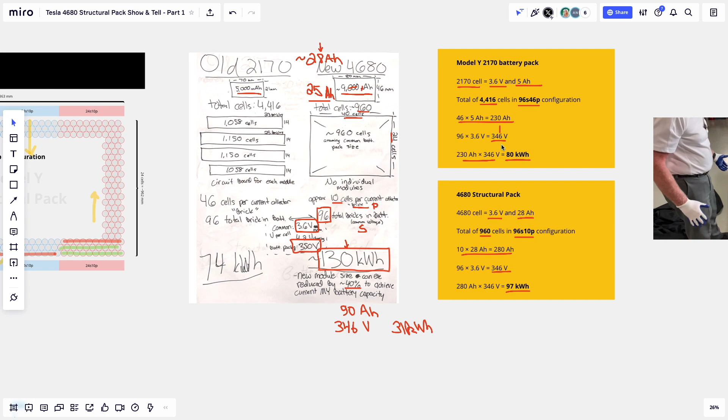Okay. Then one last thing, for sure. What about, like you said, issues of side impact? Why wouldn't you pick up, let's say, negative from one side and positive from the other side of the pack, and then the wires would be your buffer? So there's basically the current collection on the cell level. On the cell level, it's done at the top, both for the 2170s. It's those tiny little fuse wires that are bonded.

We saw the photo from Berlin with some sort of metal bar that's either laser cut or something like that that makes these connections. And then you have the bus bars where you connect these modules or pseudo modules, as you want to call them, to connect the positive to the negative, and then you have to output at some point the big positive of the whole pack level and the big negative of the whole pack level.

And these you probably don't want to run on the sides. It doesn't make sense as you're making the connections. And it wouldn't provide a good buffer. It's basically just a metal bar. And if you look at, let's say, the Plaid, it's actually running across the top of the pack. So I don't see how that would provide any protection.

It's more like if you damage a cell, let's say a truck slams into you at 45 degrees on the side, you probably want to have as much buffer as you can to prevent those batteries from getting damaged, because one damaged battery can go into thermal runaway. And if it's not managed properly, it can propagate to the adjacent cells.

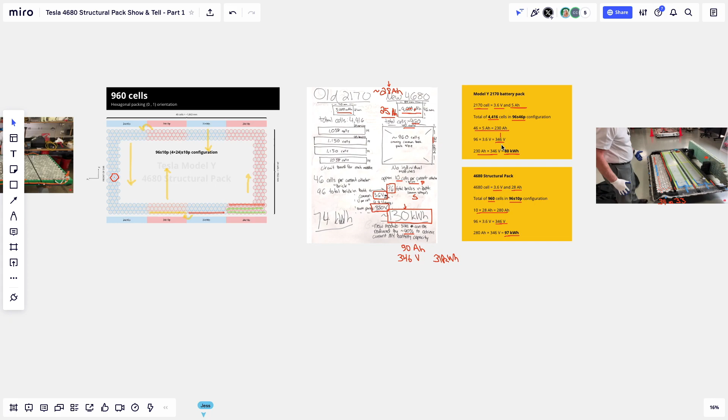So this is where I'm thinking, especially if you don't need that space, just by changing the orientation to 0, 1, you're basically saving like 10 centimeters on each side. I don't want to say something stupid, but even with the 24 cells widthwise, it's 962 millimeters versus 1.127. So yes, it's about 9 centimeters each side that you can get, which is non-negligible.

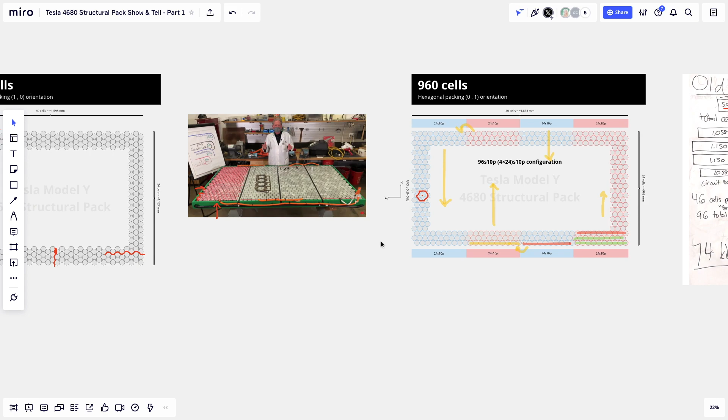Did I pass? Did you pass? Oh yeah, you passed. You got a B+. Yeah, no. A minus. Okay, A minus. Always room for improvement. All right. Thank you, everybody.